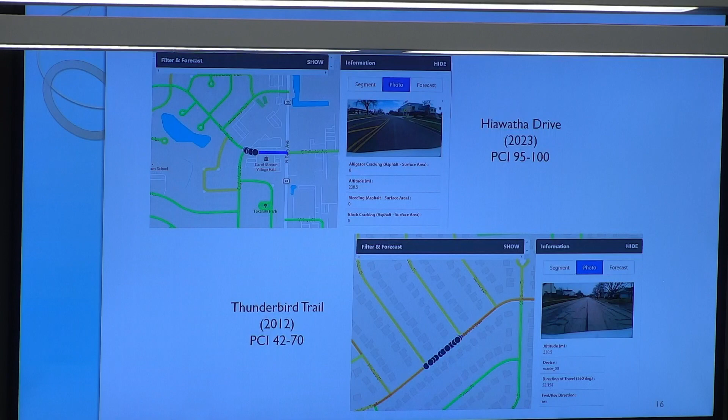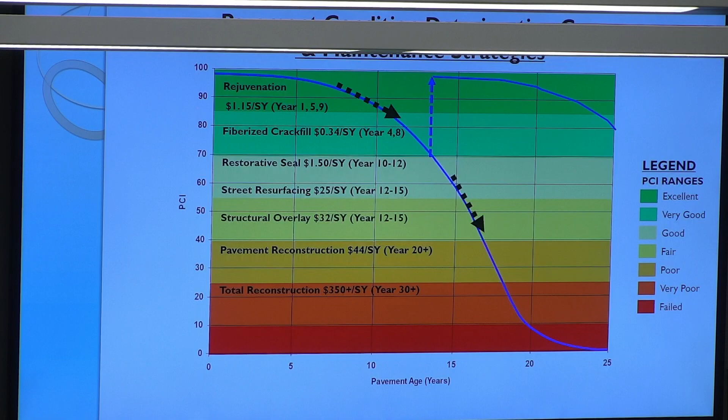The last 4 years, we've paved a lot less roads. So this year coming up, we're expected to do our smallest project yet, only about 60,000 square yards of pavement. A couple other things I want to show you: typical pavement lasts between 12 to 15 years.

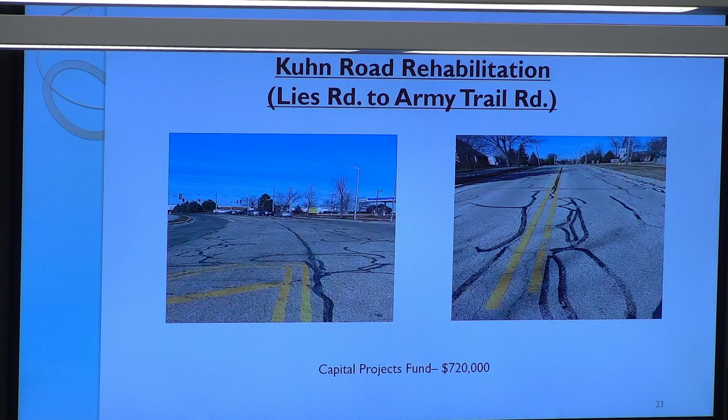$720,000 is the expected cost for that project. I think I forgot to mention the cost for the project too—so for the flexible pavement project, $3.2 million is the expected cost, plus the $720,000 for the Kuhn Road rehabilitation.

This is just a repeat slide from the past, really no change here at all. Our crackfill project is always funded out of the motor fuel tax fund at $100,000. This year and each of the next 5 years, we're not expecting any increase in that. Same thing with the preventative maintenance projects—that would be the preservative sealer, restorative sealer, patching project, and pavement marking projects. Flat rate of $500,000 per year, no change for the next 5 years foreseeably.

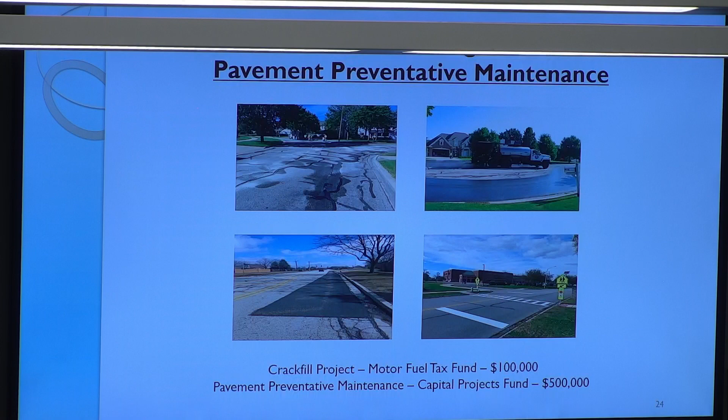So this is a project—construction is more likely going to occur next year, but this year we're going to start design engineering at $170,000 on the old Gary Avenue reconstruction project. This is going to be a total reconstruction at Gary Avenue, plus either a rehabilitation or reconstruction of the culvert at the north end of the roadway there.

This project, when it does go to construction, will be funded—any remaining Rebuild Illinois bond funds will be expended on this project, and then the remainder is expected to be out of the MFT fund.

And all the Rebuild Illinois bond funds need to be obligated by July 1st of 2025. So later on this year, once I know the closeout of the other Rebuild Illinois bond fund projects and their final dollar amounts, I will do a resolution to appropriate those funds, so we'll have that ready to go. Then later, when we have a good idea on the engineering costs for the full project, we'll do an MFT appropriation for the remaining funds at that time.

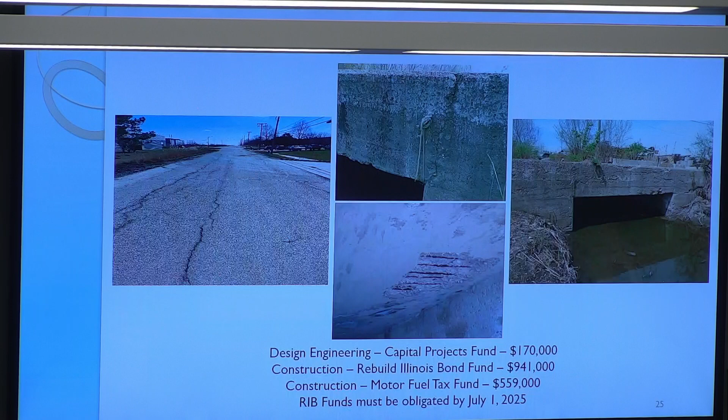And this is the Fullerton Avenue LAFO project this year. Design engineering is underway right now on this project. Total cost for that would be $150,000, and that's funded out of the Capital Projects Fund.

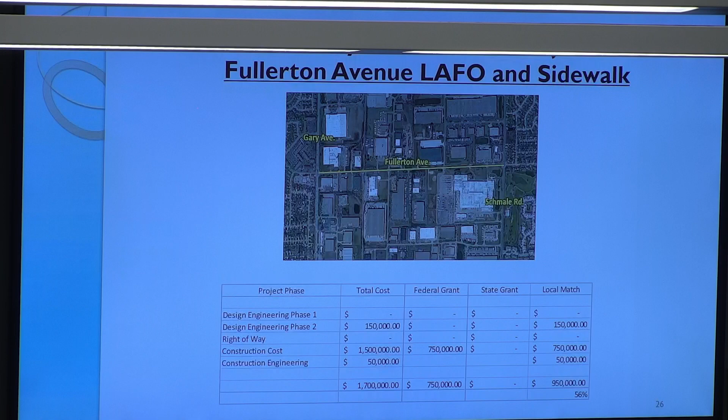And this is a $1.5 million estimated project, half federal grant and half village cost. So total cost of this project is expected to be about $950,000, and that's about 56% of the total cost.

And this project here, you probably heard recently that we've adjusted the scope of this project. We've removed the bike path on Schmale Road—we're running into all kinds of issues with right-of-way acquisition. The cost of that and the time involved was going to take years to acquire all the right-of-way and temporary easements we needed. So we've omitted the Schmale Road portion of that project. The remainder of the project will continue.

All of the values on this page here are kind of obsolete at this point. Basically, the bottom line is that the scope of the project is going to lessen, the grant funding is going to lessen because the scope is lessening, but the local match, when all said and done, will likely be less than what's posted here now. Our budget is actually already updated somewhat to reflect lower numbers for this project.

Design engineer is underway right now. There is still easement acquisition on a couple of the other areas that we are working on, so this project is expected to go to construction next year.

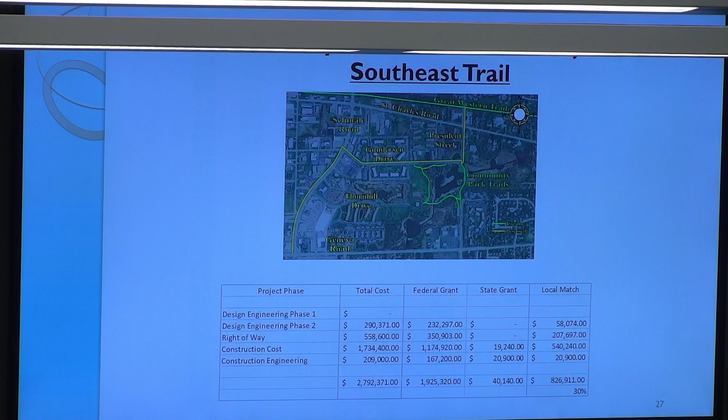Klein Creek Trail, this is a stormwater type project, so Greg will talk about this. Okay, so Klein Creek Trail, most of it is done, so I'm just going to give a brief recap of what we've done before we talk about what we want to budget for next year.

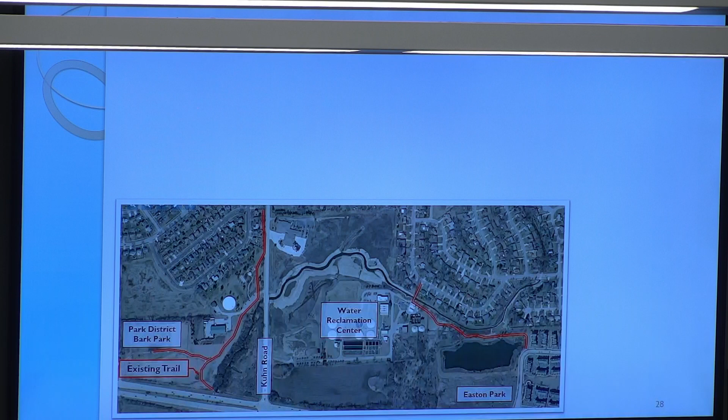First off was the extension to Kuhn Road, and that was in our 2016 comprehensive plan. As part of that, we built a pedestrian crosswalk across Kuhn Road, so it connects with the Stephen Revenessi Trail and the Great Western. We then did an extension to Thunderbird Trail because of some of the retaining wall that we had to put in that section.

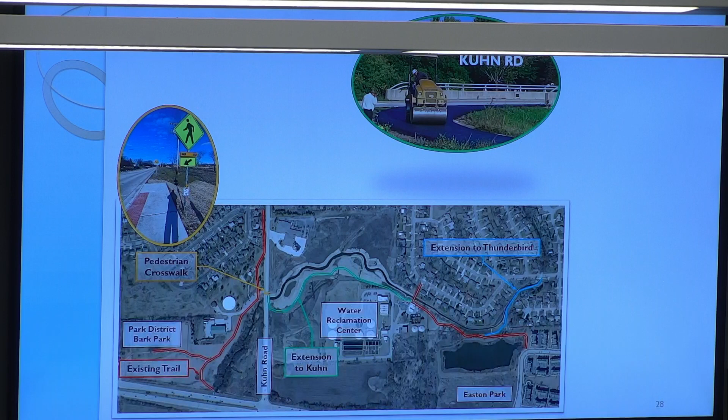We kind of leaned into that and put in a kind of a river walk feature. You can see that's the connection right through Memorial Park, right after the Park District cleaned up their portion, which I think they did a great job of. On top of the wall, the upstream and downstream end, that's kind of the quote-unquote river walk I'm talking about. We then resurfaced the existing trail that was there, so it's all brand new.

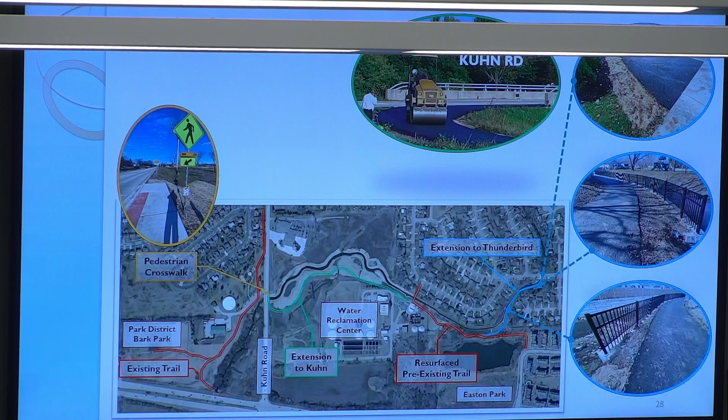So for this fiscal year, we're asking for $130,000. That's going to go towards installing the bridge. The bridge was delivered last week, and Public Works helped us offload that. It's stored at the Water Reclamation Center. I'm putting together the contract for that, so you'll see that come through while we'll be bidding it, and hopefully have that come through for approval very soon.

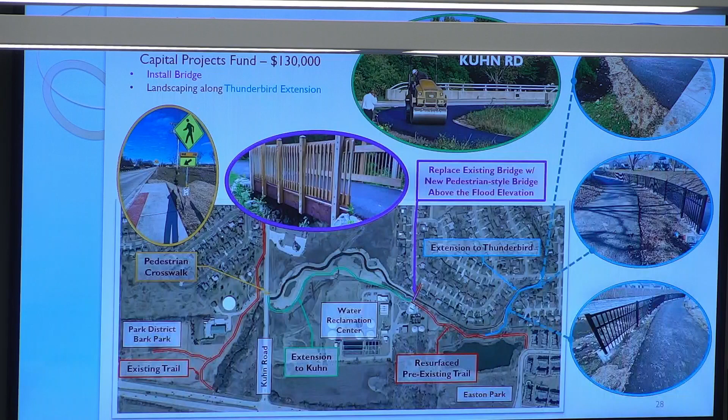And you can see on the pictures on the right, next to the railing, there's still some landscaping work to do, so the $130,000 would cover that as well. So that is Klein Creek.

All right, so back to the future transportation projects. Flexible pavement project is, again, an annual project, and it varies between the MFT fund and the Capital Projects Fund. No real change in it over the next few years, roughly 3.5 million, it's about 3.8 to 4 million per year expected.

The preventative maintenance projects, like I mentioned earlier, $500,000 expected each of the next few years. And I also said Fullerton Avenue LAFO will go to construction in FY26, so $900,000 of our funds is expected to be expended there. Southeast Bike Path would go to construction FY26 as well at $522,000 out of the Capital Projects Fund. And then the old Gary Avenue reconstruction would be in construction in FY26.

The combination of the MFT and the remainder of the Rebuild Illinois bond funds for that year. The Lies Road LAFO and trail paving from Kuhn to Gary is expected to be in its design engineering phase in FY26. And the St. Charles Road sidewalk project from Gary Avenue to President Street would start its design engineering in FY '27.

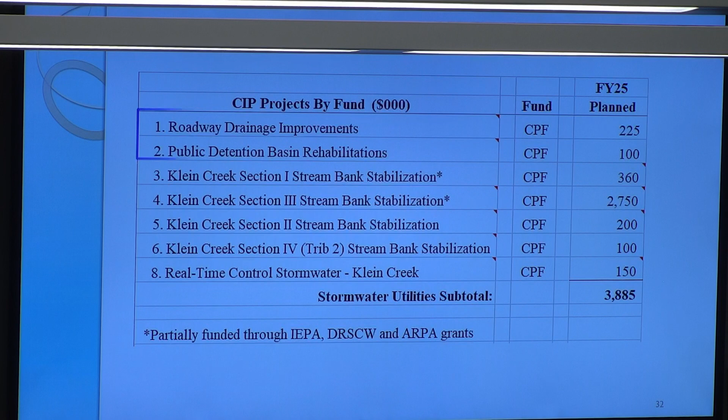We got slides, but the first two are an annual program. This one is substantially completed. We are under construction now with this one, and because of the good weather, we are making pretty good progress, so a lot of this is actually going to be expended in this fiscal year. A lot of that is also funded by IEPA, ARPA, and the Water Quality Improvement Program grant that we just got. These two, I don't have slides on - they're based on design, so if you have any questions about those, let me know.

Section 2, to remind you, is the section between Illini and Thunderbird Trail. Section 4 is from Seminole, where it connects with Klein Creek, to Gary Avenue. Those are the last two major sections. Then I'll talk about what I call real-time control, and I'm asking for a pilot study on that one.

Starting off with the first annual program - most of this is fixing roadway drainage structures that are failing, and it's too much work for Public Works to do, so we lump them all together into one contract and get it done. But we also do what's called underdrain, and that's what I focused on in this slide presentation.

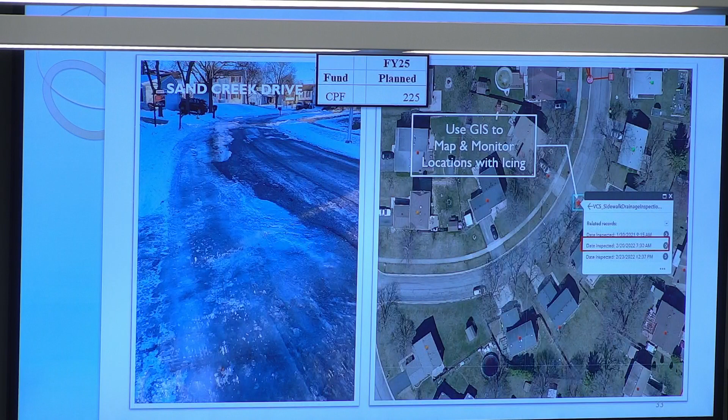First, we go out and map and monitor any locations we're told about icing or have seen ourselves, and we put that into GIS. We then take pictures over the winter period because the conditions change. Then what we'll do is map the sump pumps, because it's basically the sump pumps causing these issues. Once we know that, we can design and construct the underdrain.

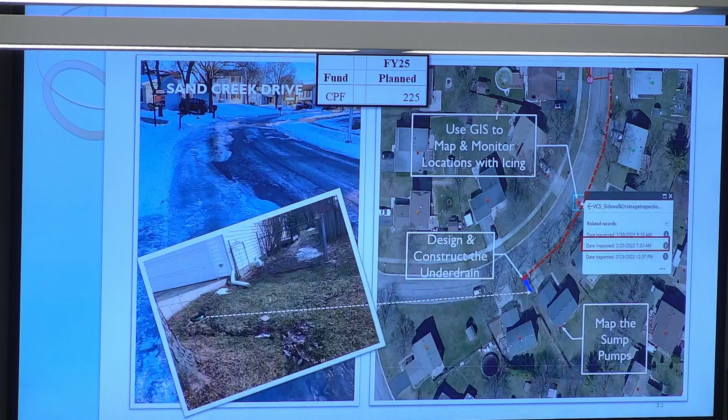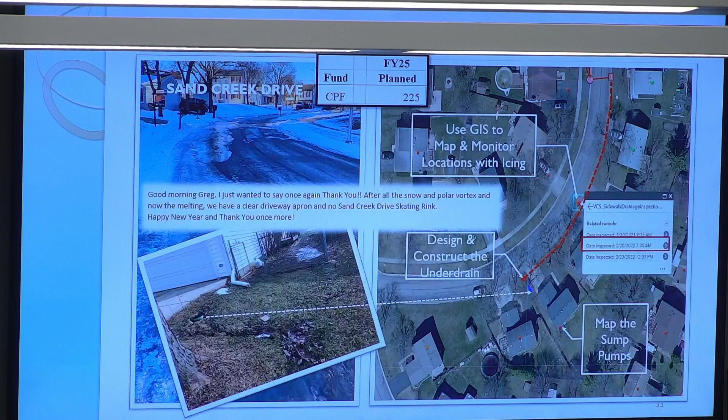This was an example of something we did last year. This is an email from a resident that says, thank you, we cleared the driveway and apron and no Sand Creek Drive skating rink. So this is what we get to accomplish with the underdrain, and it's very satisfying every year - it helps out Public Works too, with less plowing and icing. So we'll continue doing that.

The other annual program is public detention basin rehabilitations. Just for example, this is one we already did and talked about last year - that's the Park Unit 4, so that one was failing really bad. We need to get that one done right away.

We then have a whole bunch, five or six, that we talked about with Public Works and said, hey, which ones do you guys have trouble with and would like us to rehabilitate. So that's this list, and we're gonna hit them one or two at a time every year, and it's gonna kind of link into the real-time control I'll talk about later.

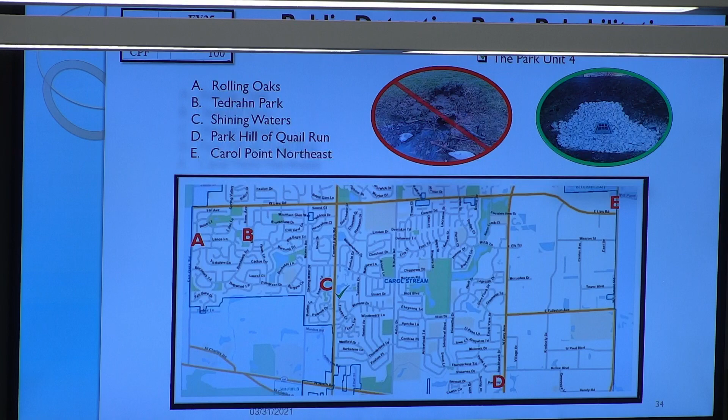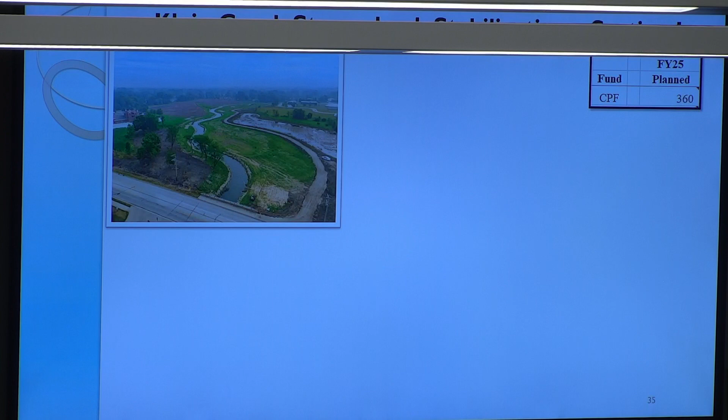This one, Section 1, was substantially completed, with 360 remaining this year for some remaining items. This is an aerial view from Kuhn Road looking back upstream, and you can see kind of the meanders we put into the creek as opposed to the straight section. Here's what we did with the wastewater treatment outfall - we made that a little bit more of a natural feature.

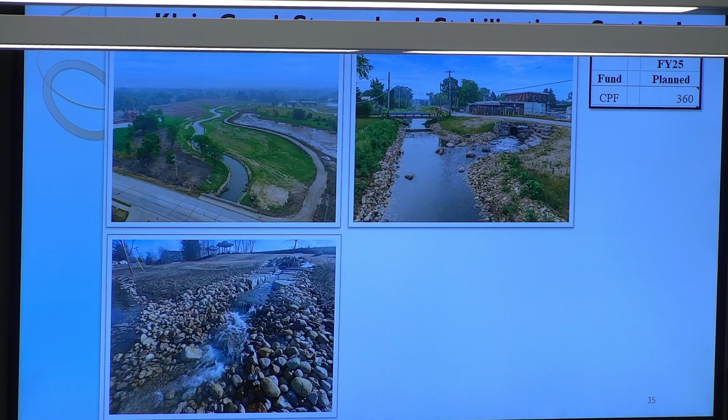This is the Easton Park outfall that was highly eroded, so we made that also kind of a waterfall feature. And this is the view from Thunderbird Trail and Memorial Park, if you remember - it was heavily eroded and kind of an eyesore. So hopefully that starts getting better over the next couple of years.

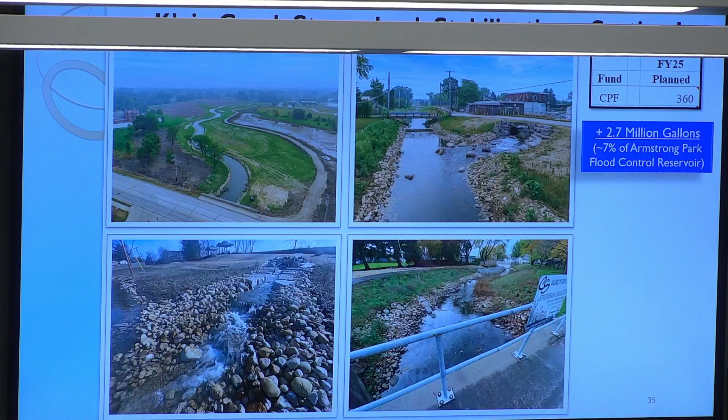To give you some perspective, when we carved out all those wetlands and dirt and made that big pile by McNeese Drive, we did gain something out of that - 2.7 million gallons of additional flood storage. That's about 7% of the entire Armstrong Park complex, the big and lower basins combined - not too shabby. That 360 is going to help us remove the bridge, because that removal is actually under this contract.

Supplemental plugs are the seedlings that we add in instead of seed. This is year 2 of the typical native plant establishment, out of 3 years. And then we'll seed that stockpile at McNeese Drive.

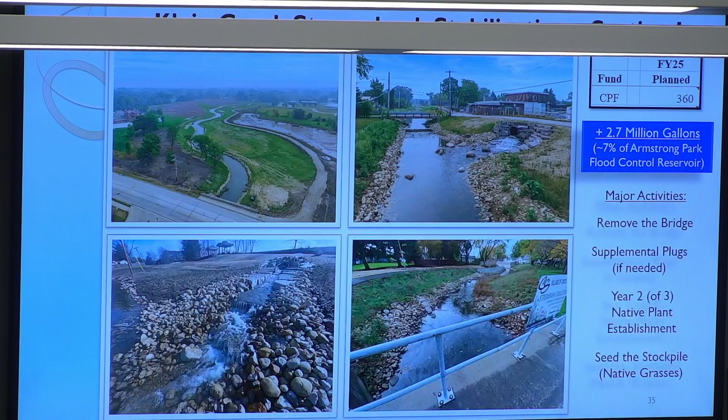All right, so section 3, which is what we're doing right now, that's close to 2.8 million. That was a view from the library pedestrian bridge.

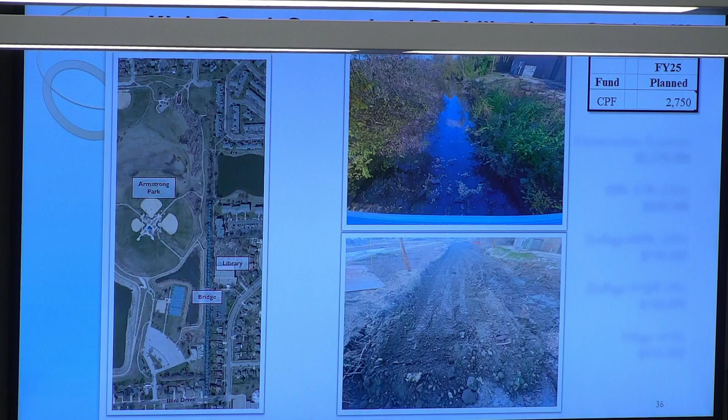Before the clearing, and this is a view from last week. It's the hardest part of the project, for sure, because it looks the worst right afterwards, but hopefully they will appreciate the final product. Obviously this interim picture is not all that great, but it's showing the progress that we've already made.

So to recap what we're doing, we've got 3 proposed wetlands that we're creating. There's some retaining wall that we need to do. A proposed path is going to replace the path we took out from the western side of Mitchell Lakes, crossing over to connect with the existing path, so you'll still have that loop around Mitchell Lakes. What we're doing is getting rid of that little sidewalk path against the Lake Haven apartments - it just wasn't feasible to get that to connect in, so we're bringing everybody to the west side of the creek.

Those wetlands provide us floodplain storage, just like in section 1. To give you another perspective, that's like building another half of that lower basin - 1.5 million gallons.

So then we take all that dirt and we're building up the sled hill. Park District's very happy about that, and it saves us some money. Same place, right south of Kids World. It's going to go up about 10 feet and look like the Wheaton North one - we modeled it off of that, if you've been there.

And then the permeable parking lot, we're using that for staging. As part of that, we've incorporated their permeable parking lot contract into ours, so as soon as the contractor's done using that area, they can immediately construct that and get it done.

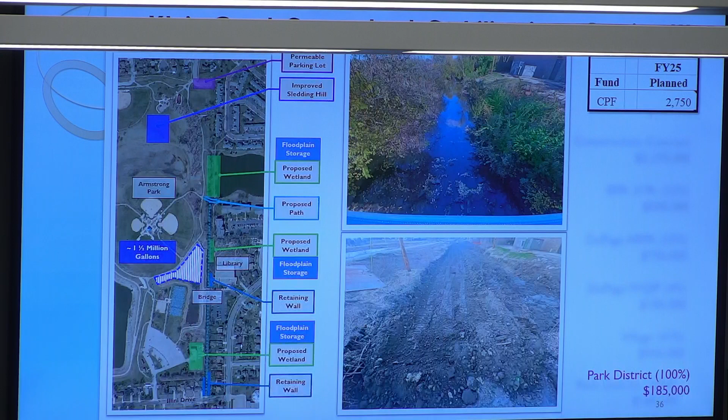Reshare this part of it on social media - we've got a number of people commenting on it saying we killed all the trees and killed all the bushes and all the vegetation. Maybe we just repost it and say, this is why we're doing it.

Then my question is, how many years before we start to see the vegetation growing back? So how long do the residents who are unhappy with their view right now have to wait?

We did, trust us, explain to the people asking us - this was invasive stuff that we needed to get out of there. Ultimately this is a great thing. It's a little ugly right now, but great things are coming because we had to do what we were doing. But how long is their view going to be ugly?

As long as the weather stays like this, we'll have seed in the ground and plugs planted as early as spring, so May and June. By the end of the summer you'll see some green, ground coverage at least starting to take effect. There's some natives that come out early that will make it look good.

Are you complaining about the trees that came down? Everything - the ones the wires from the electric would always fall on. Would that mean they'd have no power? Yeah. But we missed some trees - can't make them all happy.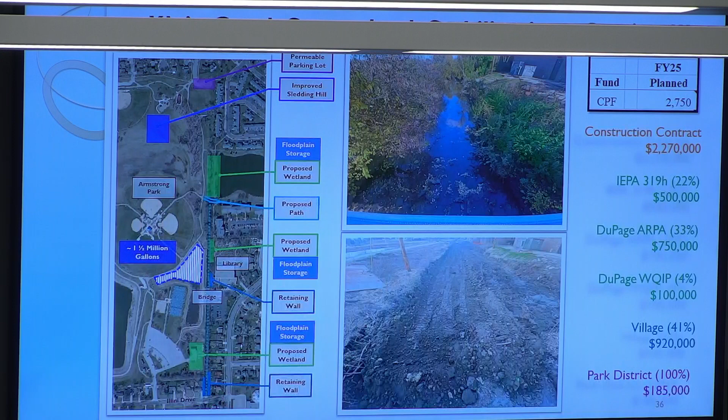All right, I'm going to be a little bit longer on this one. It's a little bit of a pet project of mine, so I've got to explain a little bit.

So I'm asking for 150. What I got last year was a grant from the Army Corps of Engineers, worth $125,000 of their time to do some computer modeling. This picture I'm showing is the state of the model they've done right now. To give you perspective on how broad it is, it goes to Windsor Park and North Avenue at the bottom, all the way up to Stratford Square Mall, so that's a decent size.

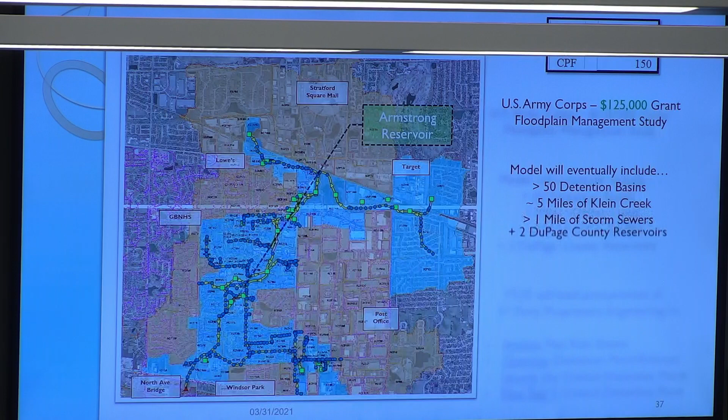Within that model, it's going to eventually include over 50 detention basins, 5 miles of Klein Creek, over a mile of storm sewers, and both of those DuPage County reservoirs. So what are we doing with this model?

No matter how much we've done with stormwater over the decades, which is a phenomenal amount, we still have flooding, unfortunately. That's just the unfortunate reality. Those large projects are complete, and there's not a lot of room anymore for more large projects like that. So what I want to investigate is the existing infrastructure we do have, and can we use technology to make it more efficient?

The analogy I like to use, hopefully you can follow along: when I drive Army Trail Road every day to come in, the lights are timed in a way that I can progress through and I don't have to stop much. Now that wasn't always the case. If you remember driving east of Gary, it could be a nightmare.

So there's two things you can do: you can either add another lane to help get more traffic through, or you could time the lights to be efficient. That's the difference with the detention basins we have now, which are kind of dummy, not smart. If we were to add another lane, we'd have to find another place to dig an entire new reservoir, and we don't have that room, just like Army Trail doesn't have the room to add another lane. So we've got to make ours smarter, like our traffic signals.

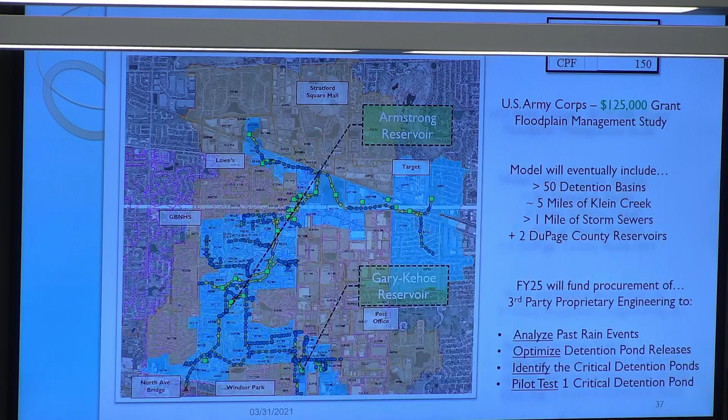So we're going from dumb TVs to smart TVs. TVs, yes, got it—but not as entertaining. Well, it will be. Wow. If there's no standing water on the roadway, it's very entertaining.

Hopefully. All right, so looking into the future, just remember these two are annual programs that continue on. Section 1 eventually gets completed with its native vegetation maintenance and goes into operating. Same thing happens with Section 3.

Sections 2 and 4 are going to be designed this year, so the idea will be to decide which one we want to do first. I think that might depend on public input, as we'll have to do for Section 2 at least—well, both of them, actually. Both are through people's backyards. You're well aware, so we'll be having to talk about it.

Well aware, I've been hearing from my brother for a couple of years now. Right, so it's his turn, right? When's it his turn? So, depending on the complexity and the feedback, maybe we will want to swap these, but we'll be ready to go with either one.

I'm going to continue applying for grants from the IEPA. Just to let you know, the DRSCW and the ARPA funds have all dried up, so those are not available anymore.

Kehoe Boulevard, Section 2—the first one was in front of AJ Antunes. Section 2 just covers all the way up to Gurzewski. From there, it turns into storm sewer and you can't do much. It doesn't look good—there are some spots that are kind of bad, but certainly not critical. So we push that into the far ends there just so we can pay attention to it.

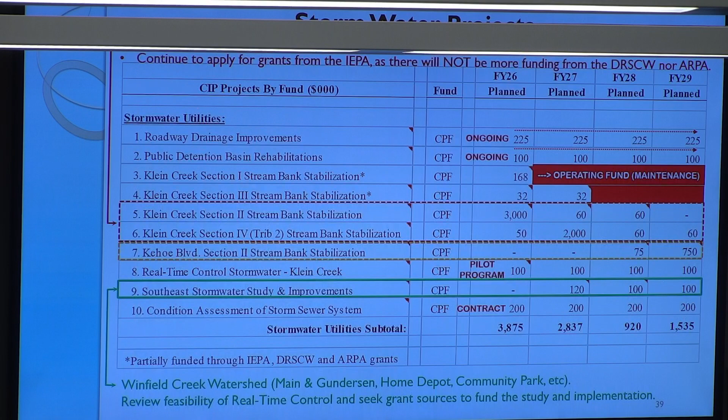So it would be ideal if we could do a similar condition assessment like we did with Red Zone, where we did the entire system. We'd know where our problems are and go after those right away. That's too big for Public Works to do in-house, so what we're programming here is another contract, kind of like Red Zone, with a payment program over 5 years. That's it for stormwater.

Thank you. Any questions for Greg? No, thank you for your enthusiasm. So I have a question.

That 56 acres of land that we own at Community Park, no one seems to want it. Could we maybe pass that off, or have stormwater dig that out and get rid of it and hold water?

56 acres of land - well, let me preface this by saying the Forest Preserve District's main goal is to save land from development. Unfortunately, this being in our control means it's never going to be developed, so it's not a priority to them because there's nothing to save. And because of that it's also been neglected, with a lot of invasives there. So if they were to take it on, it would be a tremendous burden to them for maintenance, so they're just not interested at this stage.

Well, that's it, it's over with. It's not going to stay like that forever. No, what we're doing is with the native vegetation program we have, we're chipping away at that. We're going to start clearing, dig down and make, like he was saying, a detention area.

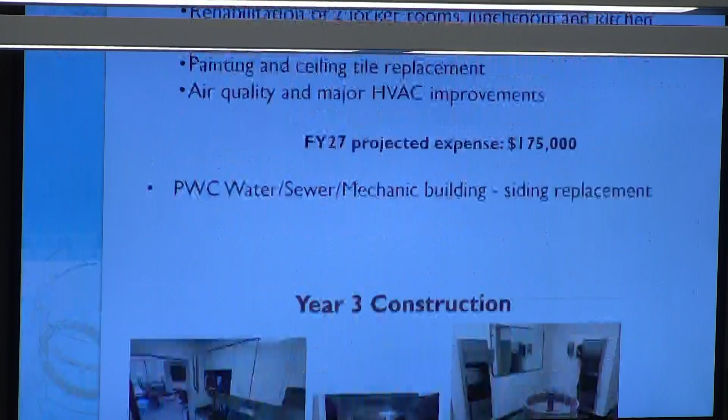If you guys have any questions on this stuff, the gentleman right here is gonna answer it for you. This is kind of a photo. Oh, my God, I'm gonna move in there myself. No more money.

This is pretty much the end of our big facility projects, so that's why it's such a small piece of the pie in the 5-year plan, because we've done quite a bit in the last 5 years. It's just the ebbs and flows of assets and how they deteriorate. Sometimes some need more, sometimes they need less.

Looking at the town center electrical, the first picture is the vault, and that's where you get in to put in, reset the circuits. The second picture there is down underground, which is a confined space entry now, which it wasn't when it was first constructed, or at least I was down there and didn't have any safety gear or anything on. It was a little different era when that was first built.

So we're gonna take a look at that and see this year, just in the analysis and design, where the power is. Those pictures on the right are on the west side of the town center, and there's a completely separate ComEd feed for that. You can see the ComEd box where I think there's a family of raccoons living in there right now.

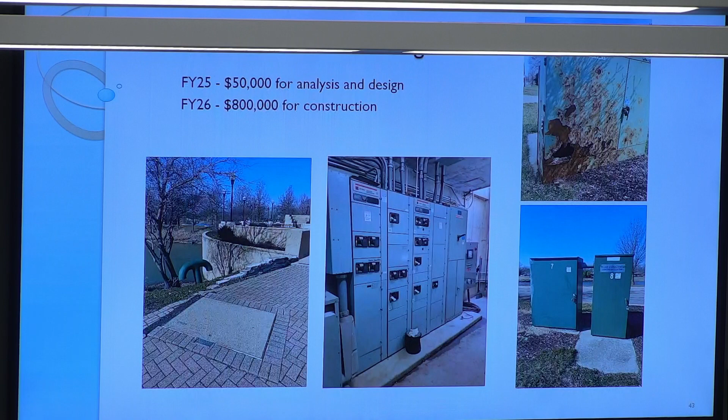And then finally, we threw in $150,000, and we've heard that there are welcome signs that need to be more welcoming. We'll also look to see what might be able to be condensed. We may not replace them all. We want to get the ones that are more, that grab more attention.

Major entryways. If you haven't noticed, our neighbor from the south, they've got that big building next to where John and Tony's used to be. Little Winfield sign right there, a nice one. So I would think we want to put one in front of where John and Tony's was, a nice one, saying we're in Carol Stream. They have one building, they make it sound like it's all theirs, and that's false. So, not happy with that at all.

And that is the end of the presentation. Any questions?

Outstanding job by all the staff. Thank you all for supporting us. You all sucked it up and let Brad spend all the money this last year. It's worth it. Those guys need a good place when it's 3 o'clock in the morning and it's below zero and they're fixing pipes. They need a place to go back to and enjoy that atmosphere. And trucks that run and spread salt. Good job, all of you. Special thanks to Adam and Greg for all they do. They really run these projects.